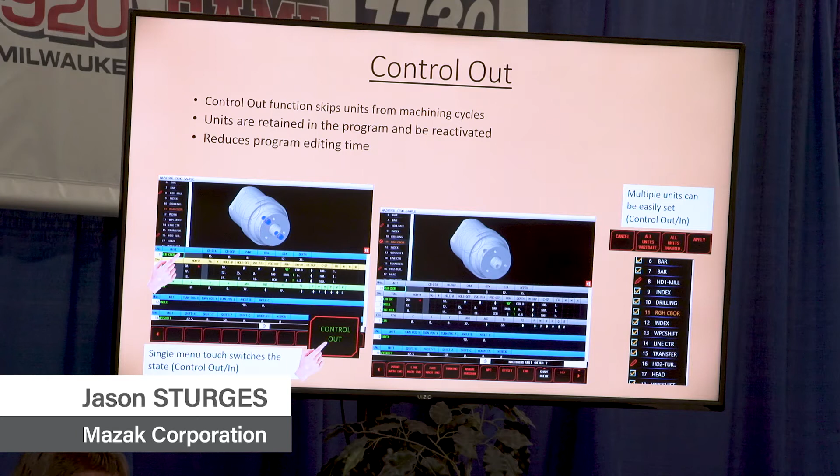You could go to your guy, you know, the guy that did the drawings. Where the shop I worked, the guy was in the next building. So it was okay in July, but in February it kind of stunk walking over there to have this guy get a drawing for me with all of these intersection points on there.

And kind of similar to a CAD/CAM system, what I can do is I can just create features and I can create chains. And this is all right on your touch screen, right? So you just touch the beginning of the chain, touch the end of the chain, touch the feature. And what will happen is it spits out all of my coordinate information for me. All of my geometry is in there.

So number one, much quicker. Number two, nobody has to do the math on all this stuff. And number three, we know this is accurate because it came directly off of the model, right? There's no chance that someone put numbers in wrong. There's no chance that somebody missed a decimal point. There's no chance that somebody did the math wrong. The numbers are coming directly from the model, so we know it's very accurate. So that came out on the Smooth control.

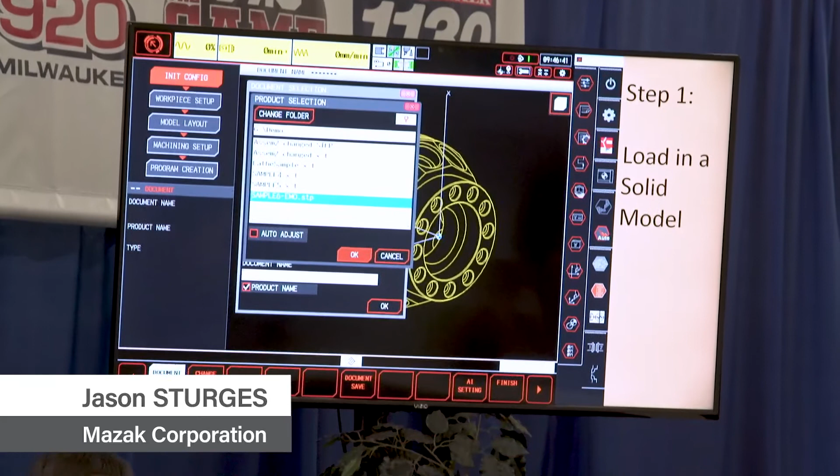But basically, I've got 5 steps in this scenario here. Number one, I load in a solid model. You can get it off the hard drive of your NC computer. You can get it off a USB that you plug in, an SD card, wherever you keep that kind of stuff. We'll load in a model. You can see that the model was loaded in there.

So, you know, I've been asking people all week with this, how long would it take you to program that? I've heard anywhere from 6 minutes to 4 hours, right? I think probably accurately it would be about, maybe an experienced programmer, maybe 40 minutes to an hour, let's say.

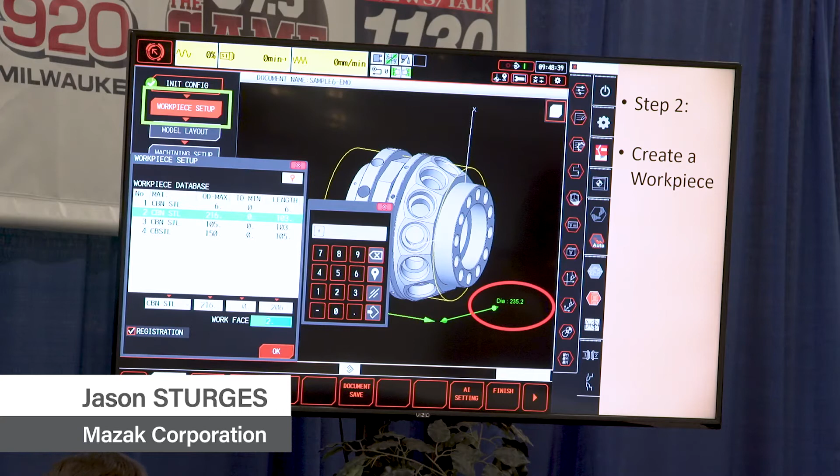So what we're going to do now is we have to create a workpiece. So on the left here, every workpiece that has been entered in here before stays in this library. So if I do a lot of repetitive work, I don't have to create a workpiece every time. I can just go in here and simply select the one that I want. And you can see the yellow wireframe there is the workpiece. And now it kind of creates it as a model.

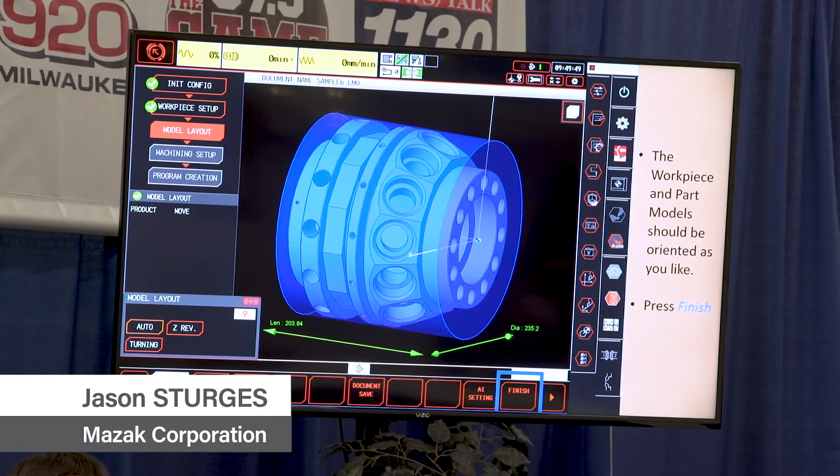So second step's done. Third step is I need to align this workpiece with this model. So for the most part on a turning machine like this, I can simply hit the auto button on there and it lines it up correctly. This particular machine had 2 spindles, so if I want to do the other side as the first operation and kind of flip it that way, that's what the Z reverse is for. And on any odd shaped castings, I can choose a diameter to put on center line of my lathe and it'll work everything off of there.

So that's the third step done. So you're already halfway done to just getting a program off of this model. So now here's what it comes down to. They give us a nice cross section of this part here. And what I need to do is tell it on my outer features how far do I want to go on the first operation and how far do I want to go in Z on my second operation, okay?

So you can see the yellow arrow up there. You can do this with the touch screen. You can just touch anywhere you want. You've got some arrows on there. You can just hit the arrow and it will go from shoulder to shoulder to shoulder, or you can simply put in a number. If you need to go 3 1/4 inches, you can just type in 3 1/4 inches there. This is metric. The part's not actually 99 inches long. Came off a metric machine.

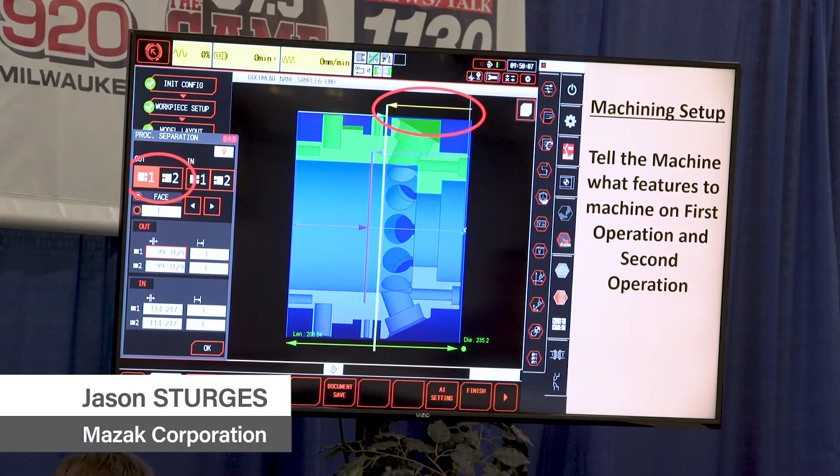So I just need to tell that on head 1. And then also on head 2, I need to tell it back with the yellow arrow coming the other way how far I need to go with my OD features there. Then I'm going to do the same thing with my ID. You got the gray arrow there. That's where I want to go on head 1 with my ID. And then on my head 2 operation, I'm going to come back the other way to the same place.

Now, we got a lot of holes in here. So we may have features on here that need to be counterbored. They may need to be reamed holes or tapped holes. Maybe we need to turn threads, things you don't always see on the model. So we do have a spot where we can take care of all this. Basically, I can put an attribute on here, and it tells it, like down here, we've got a reaming or a boring. I can select that.

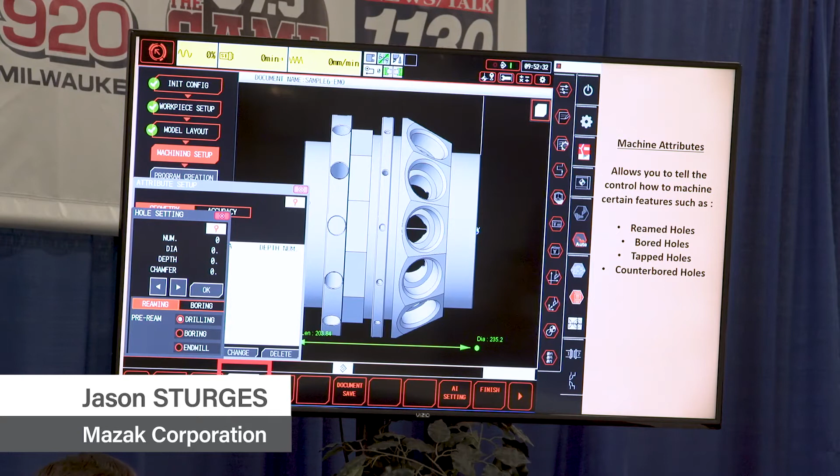I simply highlight the hole on my touch screen. I tell it what I want it to do, and now it's going to actually create a unit to tap, or a unit to ream, or a unit to bore, right? It's going to create center drill, drill, tap. It's going to create center drill, drill, ream. So you're telling the machine what units it needs to make this part.

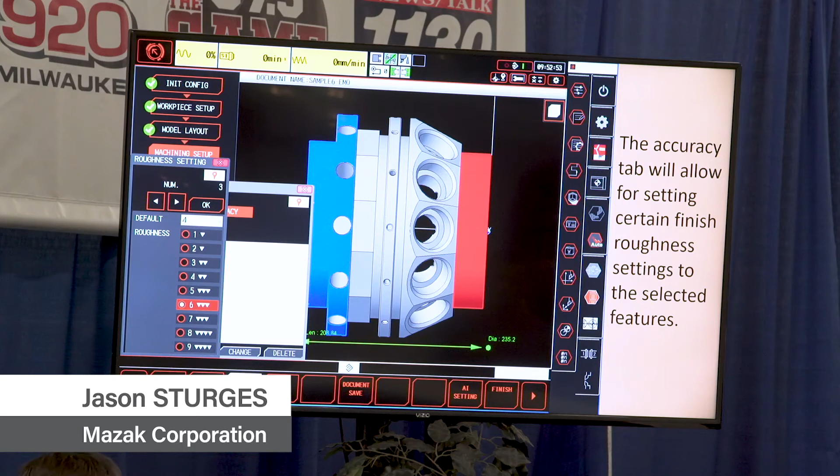Surface roughness, again, I can simply highlight on the model different surfaces. Maybe some are getting ground and I don't need to waste time getting a very fine surface finish. Maybe some of them I do. So I can put different surface roughness on different features. I simply hit OK down there at the bottom.

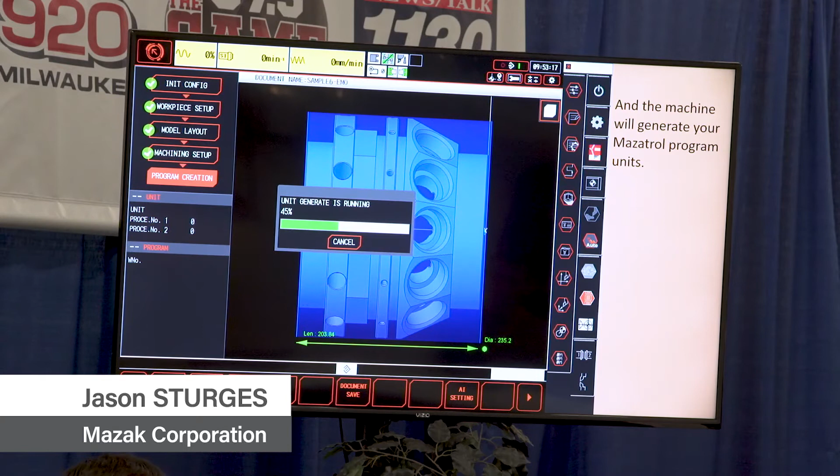And this is where it takes time. So this part actually on our simulator right over here took about 3.5 minutes to generate the program for this part. So we just talked about taking 40 minutes, an hour. About 3.5 minutes, it's going to create all of the Mazatrol units for this part.

Now we can see all our units here. If I want to reorder units, say I want to turn it before I drill it, or I want to copy this, I want to run a finish pass twice, I want to copy a unit, edit a unit, I have that option before it generates the program. And as you go, you can see here the T drill face is highlighted, so it's going to show you exactly what the drill is going to do as well.

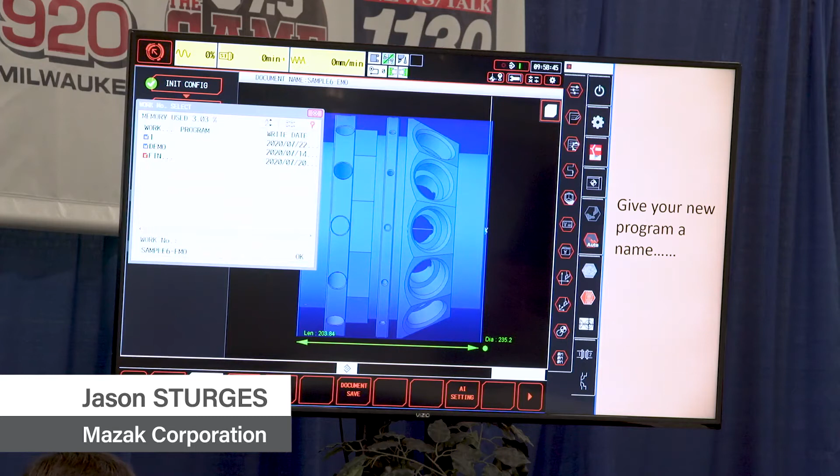I hit OK there, it asks me for a program number, and it takes about 2 seconds. It generates the entire program for this part, right? Has WPC units. It tells it head selection units, indexing of the turret, chuck transfer. Everything is in there. You may need to go in and select exactly which tool you want for some operations. You may need to go in and put in some cutting conditions, your cutting feeds and speeds. But other than that, this thing will be ready to go.

So here again, we want to talk about what the AI technology can do, saving you 45 minutes in programming on this part. Number 2, everything was taken directly off of the solid model. I think this program has like 150 units to it.

The odds that someone does some bad math, puts a number in wrong over those 150 units, happens every day. We've all scrapped parts because of that, right? So accuracy and time savings right there with the AI.

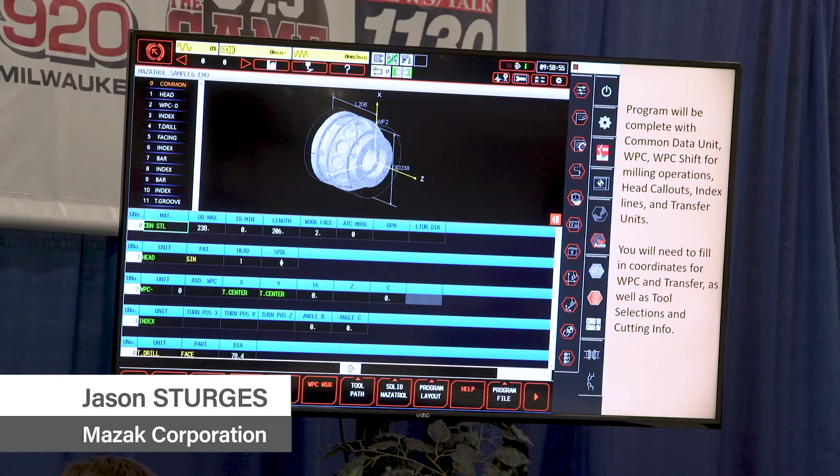Now, common misconception with Mazak is Mazak has their own, they got this Mazatrol stuff, right? They don't run G-code. We've been running G-code for like 45 years on our machines. We run it as good as anybody, right? So we've also, on the AI control and on the Smooth control, updated some handy stuff that we can do there.

We still have a lot of people that do a lot of hand editing and canned cycle G-code programming on their machines. So what the Smooth AI control did is it said, all right, I can open up my tool data window right here. I've got a 72 tool magazine. I don't remember what number the tool is. I can just scroll through there until I see what tool number I want. I can select it, I can hit the M6 button, and it will add that tool change right into my program. Same thing with canned cycles, or fixed cycles, drilling cycles, turning cycles.

You know, I can never remember, oh, I'm doing a G83. That's some kind of deep hole drilling cycle. I can never remember what Q means or what P means or what R means. Now they have all that for you right here up on the top right box where it's got the G83 in there. You can see it has all the addresses right there, X, Y, R, Z, Q, F, but it has a description of what each one is right next to it. So now I know what I need to put in there. And as I write it, it's creating my program line at the top, and it puts it right into the program for me. So custom EIA screen.

Finally color-coded these things like our G-code editors have had forever, our Cimco and everything like that. Different colors for G-code, M-code, tool change, sequence number. Makes it much handier than when everything's just all the same color in there and you're trying to find some very specific things in the code.

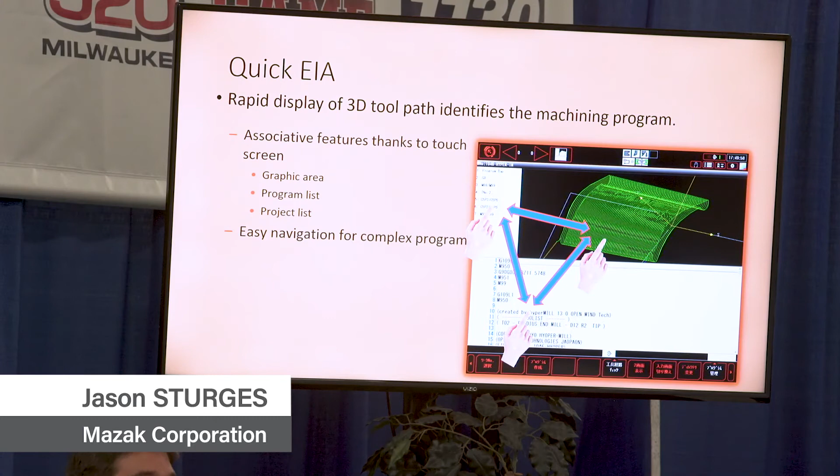So now with the EIA, we've got what's called Quick EIA. It's a pretty cool feature. On the top left part of this box, it sorts out some ways for me to jump through the program real quick. It'll go through by rapid or feed modes. They got an example in here, a G5 high speed on, and it'll allow me to search right there. It'll take me directly to those lines of code. Some of these programs are hundreds of thousands of lines of code, right? You don't want to sit there and do this for 5 hours on your touchscreen. It's an easy way to search and get in there.

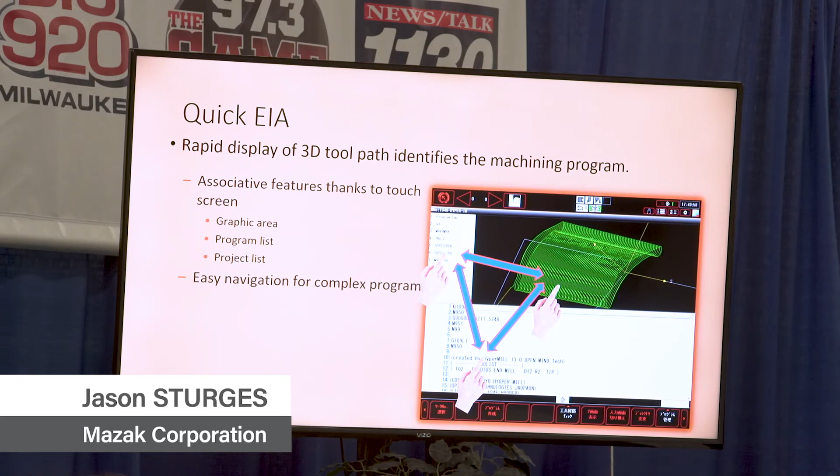Now on the right, you can see all these green lines. It's actually creating the toolpath. This looks like some sort of blade, maybe a turbine blade or something. But I can enlarge this and touch on any one of those movements, and it will take me to that line of code. So if you have a toolpath and something just doesn't look right, it'll take you down to line 53,265 where that movement is. You can say, okay, that's what's wrong there. So very powerful tool, very easy way to analyze your toolpath and play with your code.

The other thing we've got is this Surf Analyze. It'll analyze your toolpath and highlight directional changes. When we get into contour milling, freeform milling type operations, the directional changes are very important. That's where you lose your smoothness. You have to accelerate and decelerate around these curves correctly. So there's a way to just identify all those, look at those, and go right to the code.

Macro comment. Anybody do a lot of macro programming? Right? You get in there and you're writing to variables. Say your probing is writing to variables, and I never remember, is it 503 or 505? Is that the one I'm supposed to look at the number for? Now you can put a comment right next to every single macro variable and label it right there. So when you go to your 500 variables, it's telling you on each one exactly what it is. So very handy.

Just keeping in times with all the computer stuff here, we've got a screen history now. So instead of having to hit the left arrow and the right arrow as much to change back and forth on screens, it's gonna save your last 3 screens right there, as well as your apps manager. So Smooth AI is a CNC control fused with a PC, right? So you have applications stored on your PC that actually run on the NC. So all those will show up here.

If you guys do Renishaw probing or set and inspect or things like that, that app will always be right here, okay? And we also have our manuals on there. So anytime you're stuck, you can just open up a manual right there on your control. You can do a control F keyword search through there and find things very quickly in your manuals.